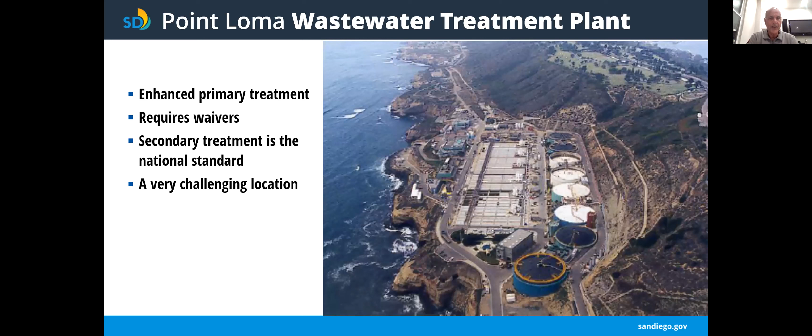Pure Water is a response to that, to develop a local supply of water that's reliable and sustainable. So currently, this is the way our water system works.

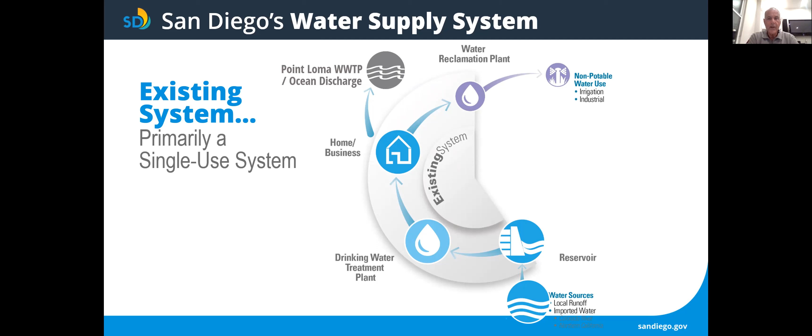The water comes in from the bottom, goes into reservoirs. The city operates 10 reservoirs. Then it goes clockwise from the reservoirs to 3 different drinking water treatment plants, and then up to homes and businesses.

Then the water becomes wastewater, and most of it is discharged at Point Loma, that first picture. Some of it we already reclaim at a water reclamation plant that produces non-potable water, meaning you can't drink it. It's used mostly for irrigation, with a little industrial use too.

What Pure Water does is take the water from the water reclamation plant, which will be expanding, and puts it through another treatment process at the Pure Water plant, which is very advanced treatment. From there, it can be put right back in the reservoirs. That's how Pure Water completes the circle and provides a local supply of water.

Some people say it's hard to understand why this is important or why we would do this. Currently there are about 400 discharges of wastewater into the Colorado River and Northern California, so it's nothing new for San Diego and almost all cities. We're just doing it locally.

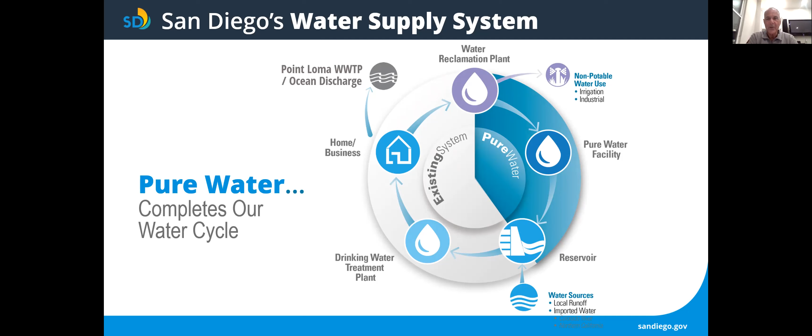This is the overview of Pure Water. It's 2 phases. Phase 1 is the north phase, under construction, affecting your area. The North City plant is where the current reclamation plant is, right at 805, just north of Miramar Road. That's the plant being expanded.

Across the street, an entirely new Pure Water plant with 5 different advanced treatment technologies is being used to create pure water, which is pumped over to Miramar Reservoir, where the treatment plant is. There wasn't enough sewage coming in naturally, so we're also building a pump station to pump additional sewage up to this location.

This is a 30 million gallon per day project, scheduled to be completed in 2025, so it's well under construction. In about another 4 years it'll be done, and it'll provide a good part of the water supply for the north part of the city.

Phase 2 is the second phase, the central area. This is in the final planning stages. Whereas phase 1 is 2025, phase 2 is planned to be completed by 2035. This phase is almost twice as big as phase 1; entirely new facilities will be built.

One facility will be by the airport, one south of where the old Murphy Stadium used to be. That will treat wastewater from the central part of town, and it will be discharged into either Lake Murray or San Vicente Reservoir. That decision's still being made.

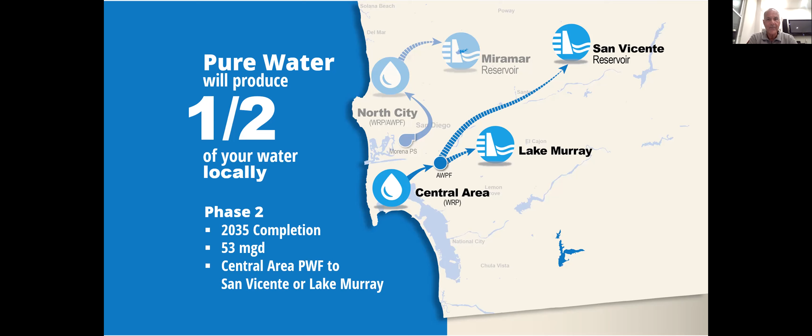This is the overview of where the neighborhoods are. Down at the bottom is the Morena Pump Station, the little purple circle. You can see the pipeline going up through there to the north, to where the facilities are. That's called the Morena Pipeline. There are some neighborhoods we're involved with down there, Bay Park, Clairemont, and so on.

In the middle is the University City Eastgate Mall neighborhood. That pipeline contains basically wastewater, sewage. After the Pure Water is produced at the north site, it's pumped 8 miles across, mostly on Miramar Road, over to the Miramar Reservoir, which is at Scripps Ranch. That's where the treatment plant is.

We have these various neighborhood groups in these various areas that we've been working with for years to get their input and listen to recommendations. The Pure Water project actually consists of 11 separate construction projects: several pipeline projects, the reclamation plant project, the Pure Water plant project, and some pump stations. Altogether, the Pure Water projects for just the north phase, the first phase, total over $1 billion for the 11 projects. It is the biggest and most complicated capital improvement project the city has ever done, and it's under construction.

This shows the construction packages that specifically affect this area: the North City Pure Water Facility and Pump Station, and the Pure Water Pipeline, and the scheduling. They're basically under construction, with scheduled completion in 2025. Of course, they're constructed in phases, and Clem and Stephen will go through the details of what will be happening in your area.

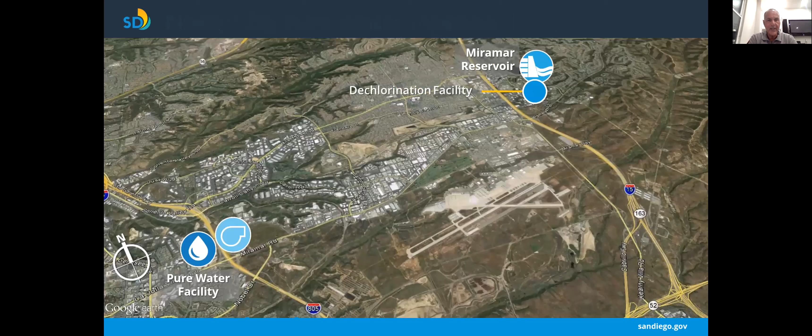This is my last slide. This shows the actual route of the Pure Water from the Pure Water treatment facility on the left side there. There's a pump station that will be pumping the Pure Water, mostly across Miramar Road, about 8 miles long, and it'll pump it into the Miramar Reservoir.

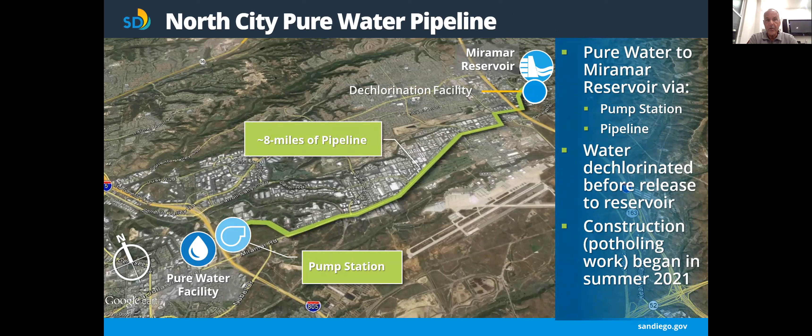So with that, I'm going to turn it over to our construction experts who will walk you through exactly what's going to be happening. Clem, I'll let you take it from here. Yeah, thank you, John.

Focusing on the 8-mile stretch of pipe that we're going to be installing between the treatment facility and the reservoir, the contractor's work is generally broken up into 3 different activities: the first being potholing, the second pipeline installation, and the third the work around the reservoir, or the subaqueous pipe as we're calling it.

Currently, the potholing activity is happening — that's the construction phase we're in. The contractor will be working from the east of the alignment towards the west. Over the last 2 months, he's completed all the potholing work east of the 15, and has now started on the west side. The majority of the activity will obviously be on Miramar Road and Eastgate Mall, but we're also including Kearny Villa Road, Candida Street, Via Pasar, and Via Excelencia.

Clem, I just wanted to note for those who don't know, in this case potholes are good things. What potholing means in the construction industry is they poke little holes in the ground to find out where the existing utilities are. We have maps that show where utilities are, but they're often not exactly correct, so before you go on a big construction project, you dig some holes to verify where the utilities are, to make sure you're not going to hit them during construction.

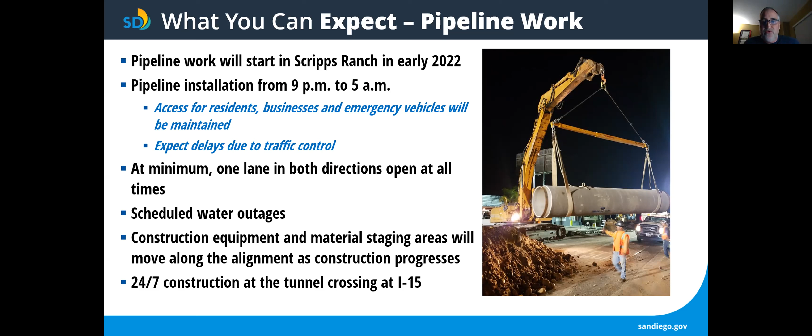What you will see if you drive along the alignment or Miramar Road during construction is probably construction equipment and a limited amount of material that will be staged and moved along with the contractor's construction operation. The work also includes tunneling, one under the I-15, and tunneling from the treatment plant into the reservoir and towards Meanley Court, also under the railroad tracks at Miramar Road. These operations could be ongoing 24/7, with the exception of the one on Miramar Road.

The third phase would be the reservoir work, or the subaqueous pipeline. That is actually the discharge pipeline that will use duckbill valves to release the pure water into the reservoir. That work will happen during the daytime. We have a work window from 7 a.m. to 4:30 p.m., however the contractor has not picked his exact working hours yet. That work will be ongoing Mondays to Fridays.

While the contractor works, he is required to maintain trail access and parking, and he has to control his work at the intersections, where the biggest impact will be. The HDPE pipe is fusion welded in the parking lot, and the contractor has to pull that into the reservoir where it's floated and then sunk to the reservoir bottom. However, even as he's pulling pipe, he can only generate limited access—he has to provide the public with either a ramp for safe crossing over the pipeline while work goes on, or excavate a temporary trench to pull his pipes through.

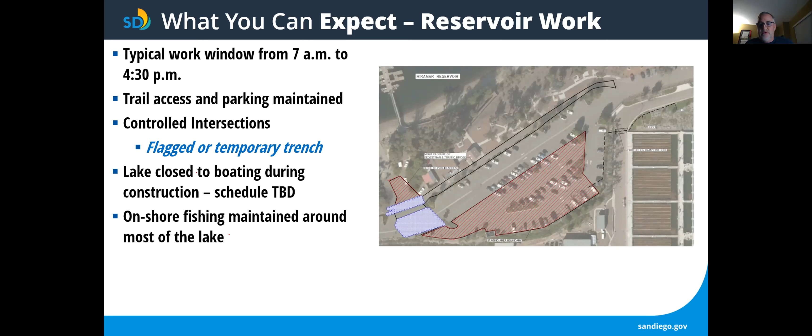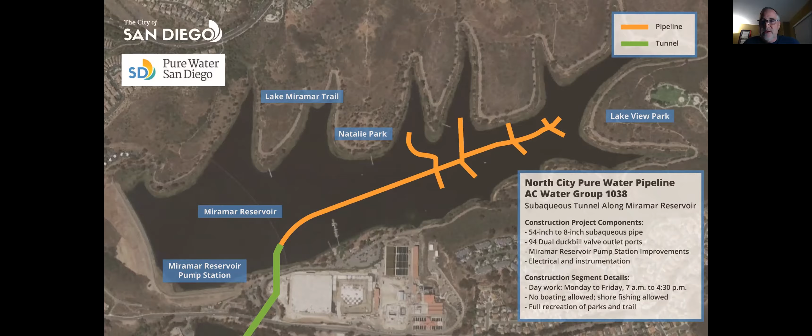This is part of the tunneling work. Right next to it, to the left, is the Miramar Water Treatment Plant. There's going to be an access shaft that the contractor uses to, A, tunnel into the reservoir, and B, tunnel in the other direction towards the private property on the south side of Evans Pond.

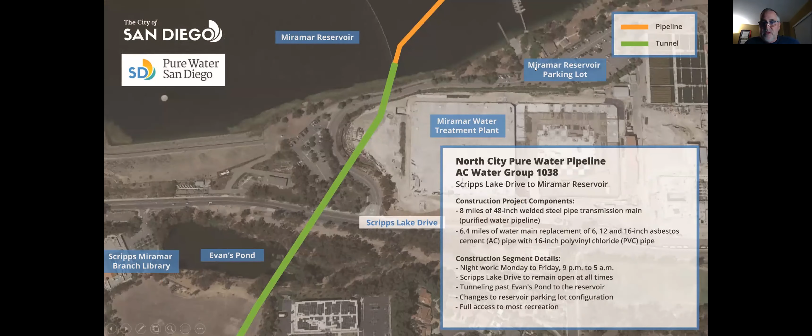Next slide. From south of Evans Pond, the line continues on private property in an easement the city obtained, into Meanley Drive and then down Hoyt Park. The tunneling operation stops at Evans Pond, and from there it's all open trench. Again, the contractor will be working night hours in all these open trench installation areas.

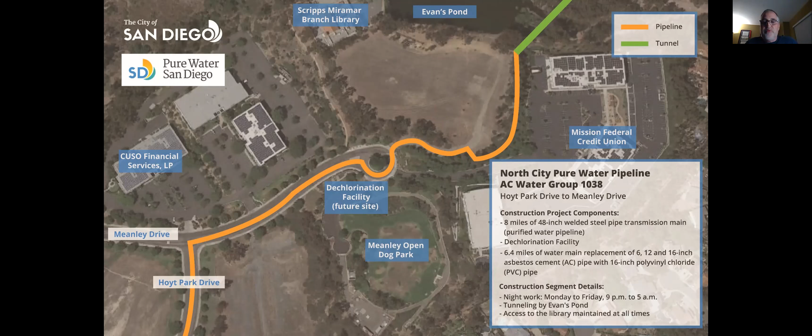The dechlorination facility is not within the street, but between the cul-de-sac and the dog park. That's a small property, and the contractor will be working in the daytime there.

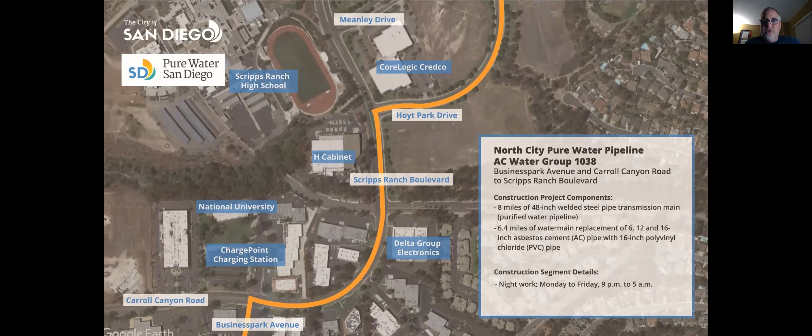Next slide. Here the alignment continues down Hoyt Park Drive, goes down Scripps Ranch Boulevard, Carroll Canyon Road, and then turns left on Businesspark Avenue. Same as before, all night work. On Businesspark, it goes into the Horse Ranch property, where on the east side of the freeway there will be a receiving pit, and the contractor will be tunneling from the west side of the I-15 into this pit. That's 24/7 work. Everything else in the public right-of-way will continue to be night work.

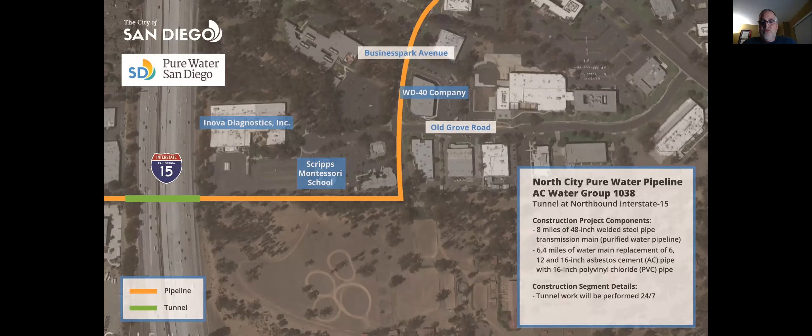Here you see the area where the contractor is currently conducting potholing, on Via Excelencia, Candida Street, and Kearney Villa Road. He's actually starting this week on Miramar Road. This is all night work. We're currently coordinating with the military base to discuss impacts with them. We've also notified all the businesses along the alignment, so everybody is aware of the ongoing work and that we're coming.

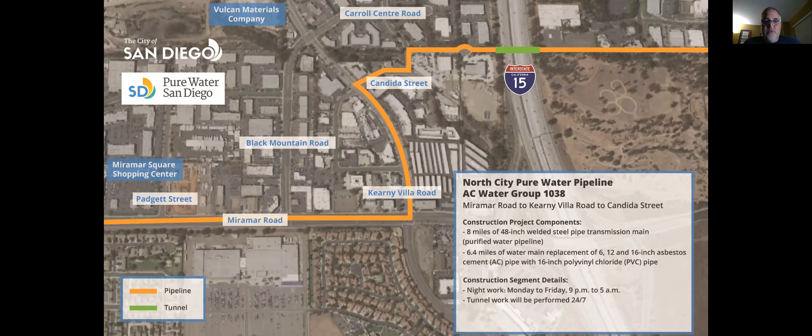It's all going to be night work. Here we're continuing along Miramar Road, pretty much more of the same—all night work. And here the alignment turns onto Eastgate, and from there continues to the new pure water facility. Again, this is all night work, and these areas have not been notified yet because we're still a while out. However, we'll start coordination with them soon as well.

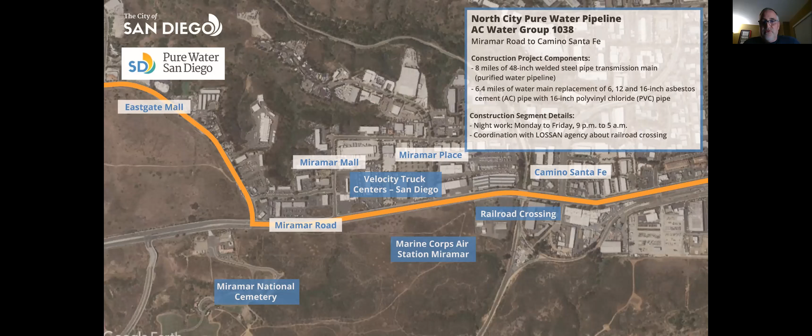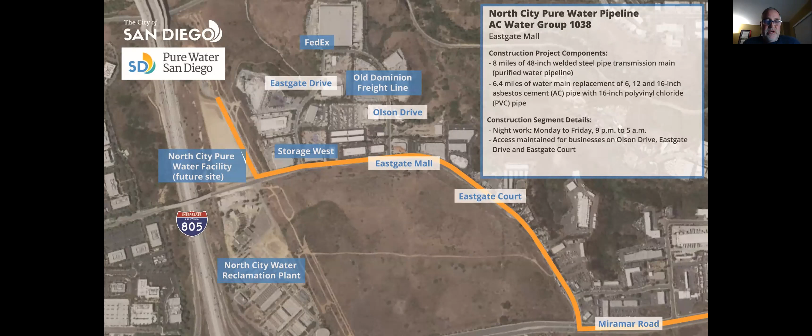And here's the termination of this project. The other project, like John mentioned, is further south on the other side of the 805. That pretty much summarizes the construction activities.

Thank you. Okay, thank you.

I know we're going long, so I'll keep this nice and short, but we wanted to share with you, now that we have some preliminary construction activities underway and pipeline construction slated for 2022, some information to stay up to date as we get closer and get a more defined schedule. Understandably, your primary question is probably when this would be near Mira Mesa, and as of now we're still waiting on the details of that construction schedule, but here's what to expect.

We have a multi-layered informational materials and inquiry system that we're already using, both to get the word out about updates, including the preliminary potholing work, and as a way to get ongoing input from the community about how it's going.

We have an updated website at purewatersd.org. That's going to be the hub of all of our information moving forward, including construction notices. We've just updated the site with project pages for every individual project, and we have a cool interactive map where you can zoom in on different project areas and see all the construction zones as work happens in different areas.

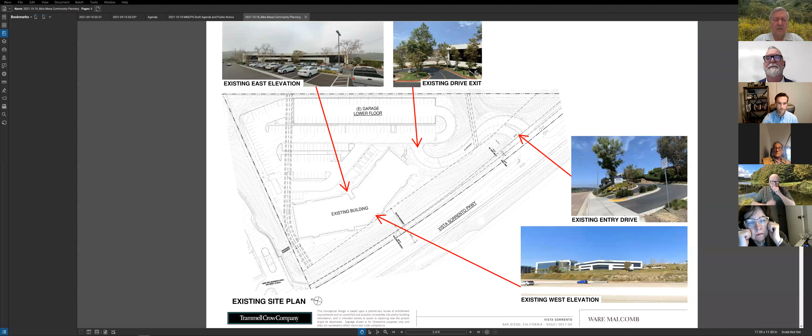Yeah, I'm not sharing my screen yet. Brian, I hit share, let me try again. How about that? Yes, that's getting it, perfect. There it is, apologize everybody, thought you were seeing what I was saying.

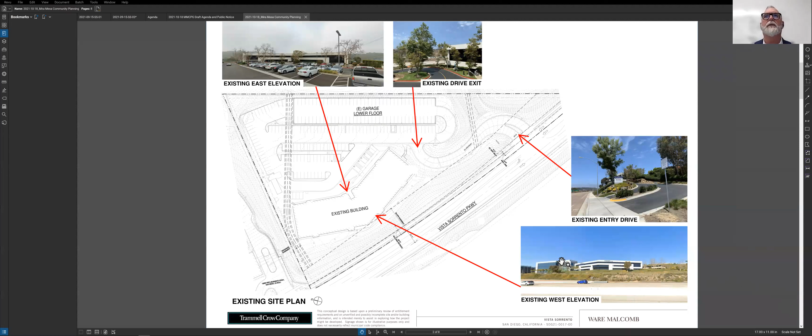So this is a quick site plan of what's there currently, which, as I mentioned, is the 72,000 square foot two-story office building over basement. In the bottom right, you can see the view from the 805 and the existing FBI building directly to the north.

What essentially we're going to propose is a new 3-story over basement life science oriented research and development building, totaling about 115,000 square feet. This building will essentially remain on the exact location of the existing office building right now, which will be demolished. It will be 1 story higher and it will be slightly larger in footprint. But overall will really not disturb the existing parking in the back or the existing parking structure.

And then in addition, we'll be doing landscape improvements on the Vista Sorrento side that faces the 805.

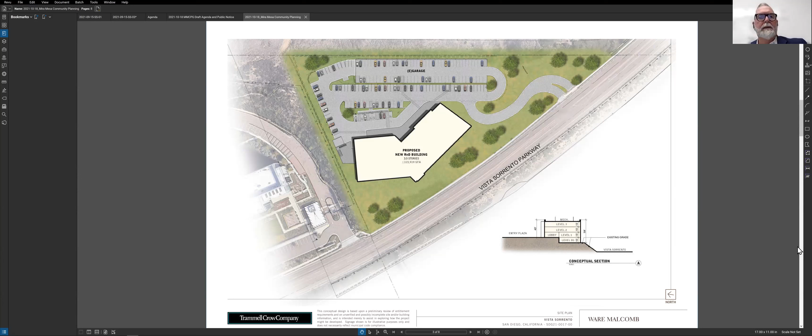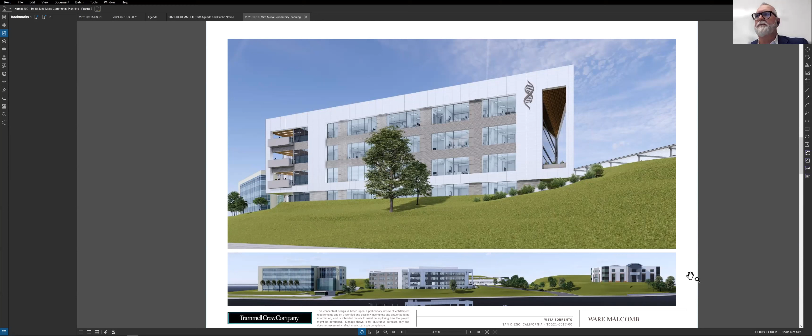This next shot here, you would be looking again from Vista Sorrento. This view, you're looking south. I think one of the things we're most proud of with the project, as Chris pointed out, is just the quality of the project that Trammell had asked us to put together. It's a very contemporary project. It'll be very appealing to the life science community.

It's slated again as a research and development facility to be about 50% office, 50% lab. And as a result, even though it's a larger overall total square footage, we anticipate that it will be occupied less densely than the existing office building that's there now.

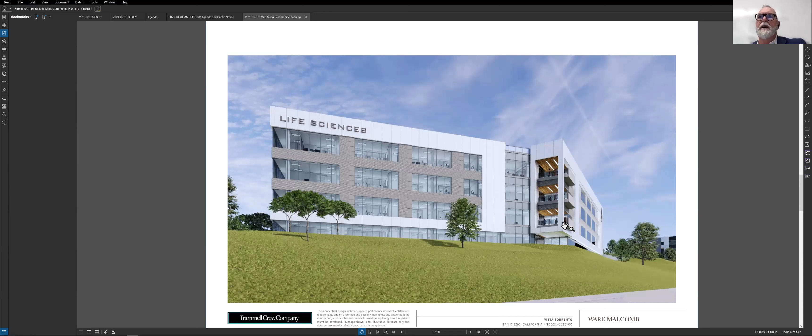What we find with a lot of the life science research and development projects is that your scientists are either in their offices or they're in their labs, but they can't be in both. So with that 50-50 split, we find that these office developments for life science really impact traffic a lot less. You get less commutes to the site. And overall, it should be a very minimal impact to Vista Sorrento and the surrounding neighborhoods.

Another view here showing how the building is cut into the existing slope, with a basement level and then the 3 stories above grade.

We're really taking a good look at energy conservation as part of the development of the project. We'll be compliant with the Cal Green Code requirements, and we're on target to try to achieve LEED certification for the building. We're really hopeful that this is going to be a very sustainable and environmentally friendly project.

Even the glass that you're seeing in these images is high performance glass, which changes slightly in color over the course of the day, so that you can stop sunlight from heating up the inside of the building and therefore use less air conditioning to keep the building cool.

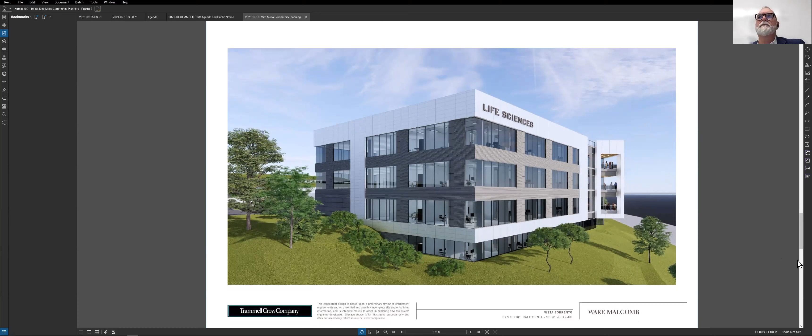Here's a view from the interior courtyard side of the building that shows the main entry, which you'd access from the parking structure behind. You'll see we've got an elevated outdoor deck on the 3rd level, and lots of outdoor areas.

What we're finding with developments like this is that the life science community here in San Diego is having to compete for talent as hard as any other industry. Therefore, these buildings have taken a quantum leap forward in the amount of outdoor amenities they try to provide their occupants.

We really try to encourage our clients, and Trammell Crow is definitely on board with this, that San Diego is one of 4 or 5 Mediterranean climates in the world. That allows us to provide a lot of outdoor space for use by tenants, which in other markets just wouldn't be a factor.

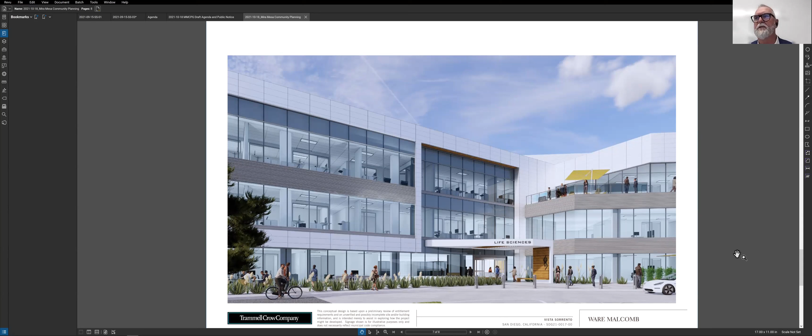And then finally, this last image shows you the amount of outdoor amenity and gives a hint at the landscape upgrades we'll be providing as part of the new development.

We're very excited about the project. It's something I think is going to gain a lot of attention in the marketplace. It's going to be very visible from the 805, and we really think that in the end it's going to be a wonderful upgrade to Vista Sorrento and to the neighboring buildings.

Any closing thoughts, Chris? Yeah, just a couple. As Brian mentioned, we're really excited about this. We eat, sleep, and breathe these, so we get really passionate about what we're designing and what we're bringing to the community. This development is a fantastic location.

We're eager to replace something that's a little bit older, outdated, functionally obsolete, and really underutilized with a building that directly supports what's happening in San Diego, the local growth and all of the economic drivers.

Another point to add is that not only will this redevelopment generate additional tax dollars, but the life science companies we're targeting will be providing very high paying jobs and promote additional investment into the Mira Mesa community. So we think that's a benefit overall, in addition to just a pretty building.

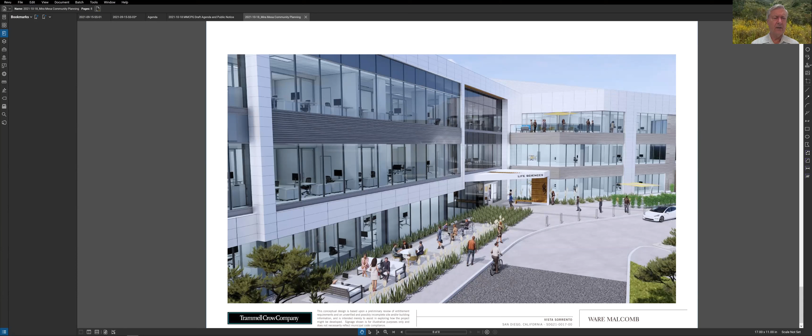Okay, actually why don't you close that just so I can see people. So I think it looks great.

But are you doing this without actually having a company in mind? Do you have a client for it yet?

We don't. We do about half our business speculatively, meaning we build these things and believe they will come. The companies are migrating east a bit from Torrey Pines and UTC, so the overall Mira Mesa area is the beneficiary of that. We're monitoring closely and believe this is where they want to be. It's a great neighborhood in close proximity to all the academic institutions, and we're seeing a huge migration towards your area. Okay, let's see, Lil has her hand up.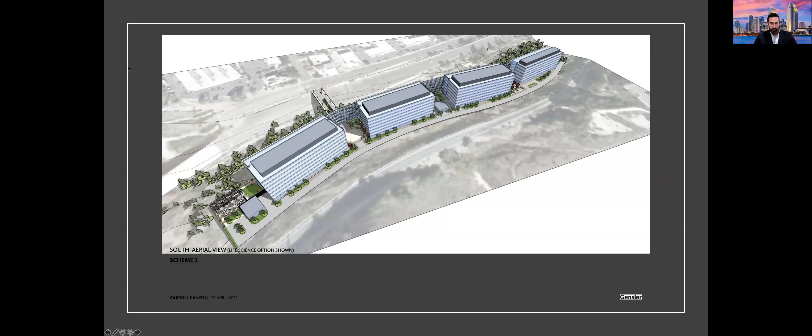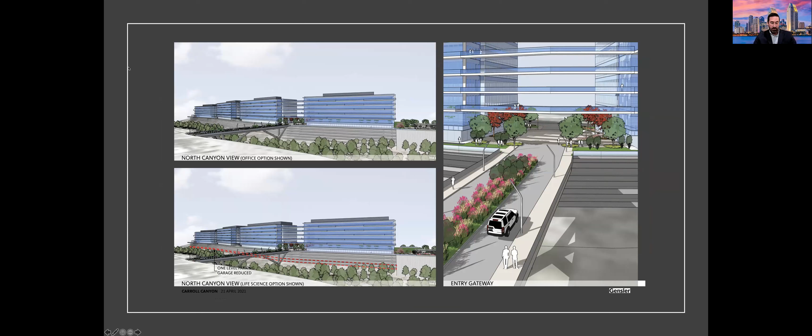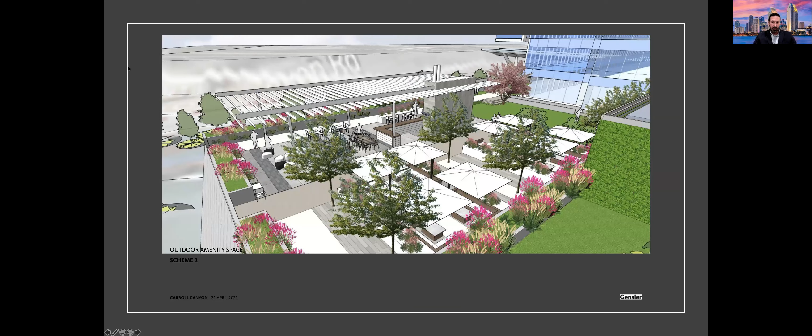Chase, maybe go to the next slide, just to give a little flavor of the vision of what the building can look like, maybe the amenity areas as well. This is one style that we came up with. We're very open to whatever style makes everyone happy, but the life science space obviously demands these types of amenities, like the previous applicant was discussing with you.

So really tonight, that's why we're here, to show you what our intention is for the property, to get your approval to allow us to go forward and spend a lot of money and a lot of time over the next 1 or 2 years to come up with a plan that would then ultimately receive approval at that point in time. So tonight is just the approval to allow us to go forward with that process and see how everyone would like to comment on the project going forward.

Just a comment: you're not an action item on the agenda, so we can't make a motion to approve your request. We can make comments on the project. That's really what we can do for you here. Okay, that'd be just fine.

Obviously the STEM type jobs are the biggest positive, I think, for the project. The science, technology, engineering, and math jobs are growing at, I think, like 73% faster than the rest of the job base in San Diego. So it's a space that's really expanding to the benefit of San Diego. The prime industrial land area identified in the community plan is immediately adjacent to us, so we would propose to just be added into that area, which is a positive for the community.

It introduces the PFFP, the Public Facilities Financing Plan - I'll try to say that 10 times fast. But that's obviously a benefit that can provide funding for the community and projects that might be slated in the area. Otherwise, without allowing this project to go forward, those would not be captured clearly.

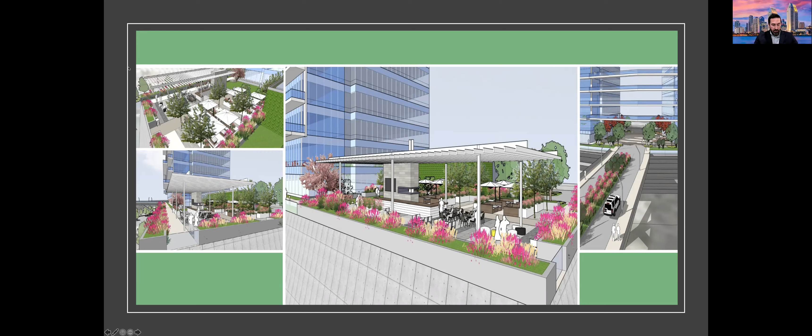Just to talk about traffic a little bit. I know traffic is a pretty important topic in your community. Being located right next to the 805, it's obvious most of our traffic is going to come from the 805, and we'd really seek to minimize traffic on Miramar and Mira Mesa as a result. The roadways in the immediate area are currently functioning at pretty decent levels, mostly A or B. We're also 2 miles from the Coaster station and 2 blocks from the MTS bus stop, so there's definitely an opportunity to do some great TDM measures here with shuttles, transit passes, things of that nature that could help limit traffic in the area. So just want to make everyone aware we're really focused on identifying traffic issues and doing our best to not cause any more problems you guys might be having with traffic in the area.

The property does have an MHPA boundary on it. Out of the 36 acres, approximately 10.5 acres is not within the MHPA.

So we would be proposing to put that 10.5 acres into the MHPA, and our site that we're proposing to disturb would take up about 7.2 acres.

We've located the buildings in the least sensitive area of the site. If you look on Google, you'll see that the southwest portion of this site has habitat that is least valuable relative to the other habitats on the site.

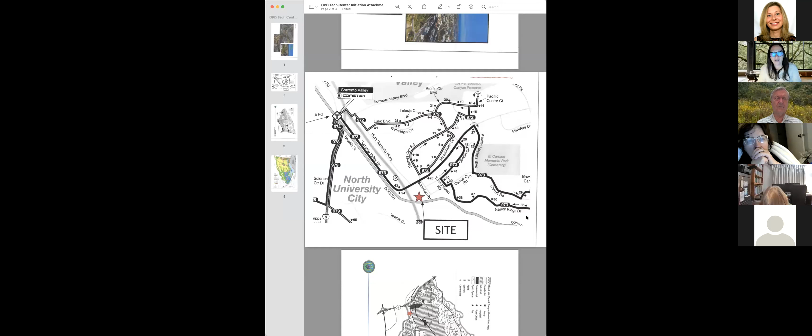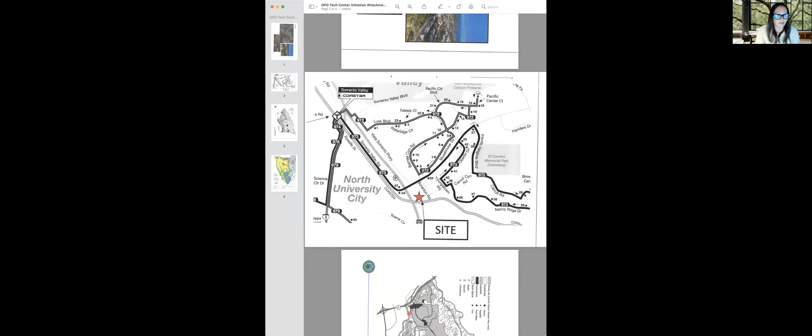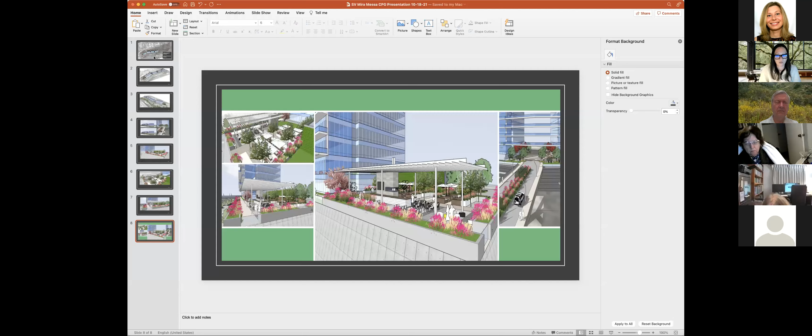Thank you. Okay, Tiffany. Yes, hi, I had a question in regards to the access. I saw that you were showing on the site plan the bridge access directly off of Scranton. And for 1 million square feet in such a large development, I'm just curious about that access point and how wide that's going to have to be, and access around for safety, being that you only have one access point to that site for quite a large development. So I was just curious if you're exploring other options, or will there be multiple bridge access points, or is it just that one access point for the entire site?

Well, again, we're very early in this process, guys. Relative to getting a second access point, the site is challenged from an access perspective. So could there be a possibility of adding a second one a little further east? Perhaps that could be looked at. But as we go forward, that'll have to be studied very closely. I don't have the answers for that right now, but certainly the intersection that's there now is pretty wide. I mean, it's definitely designed to allow for a couple of left turn lanes to be able to come in.

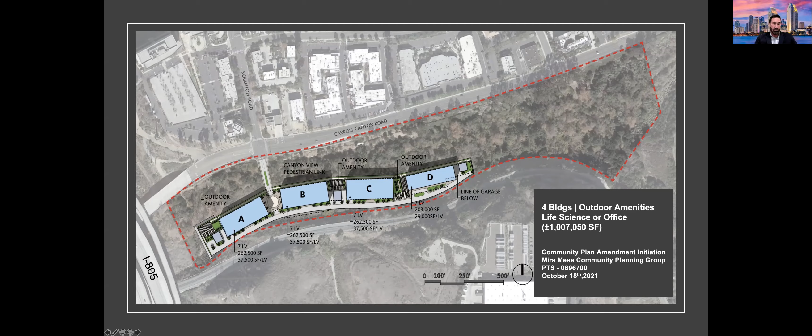There's already 2 left turn lanes shown being able to take a left onto Scranton. So the facilities that are there now are operating at very great levels of service as we speak. I think this particular intersection operates as an A right now, and it is wide enough to accommodate those 2 left-hand turn lanes. So how wide the bridge will need to be to allow that traffic to come in safely and not cause traffic problems, that'll have to be looked at, but we're not to that stage yet.

Where we're at right now is to really take feedback and notes. We're taking notes right now. As we meet with the city, we'll be doing the same thing, incorporating all these comments into the plan as we continue to move forward over the next couple of years. Thanks, Todd.

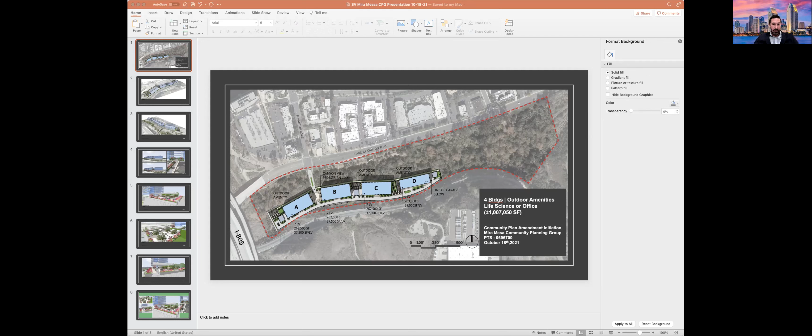Does this type of project throw off any development impact fees, or is that just residential projects? It will include, if it is approved and added to the community, development impact fees that are paid both for the community and citywide. Great, thank you.

Jeff, one comment. I think it's correct that the proposed alternative coaster station would be in that area. That was my recollection, but I haven't looked at those maps for a long period of time. I think the fact that it is going into open space, there needs to be some kind of trade-off, and I'm pleased to hear that you're willing to consider working with the city, because that coaster station could be a particularly important part of the future community plan and the actual transportation corridor that Carroll Canyon Road is going to become one day, since it will be the primary route, replacing at least some of the traffic from Mira Mesa Boulevard going from 805 to 15, because it will go through 3Roots and then ultimately through Stone Creek, so traffic unloading by having a coaster station there may be particularly important.